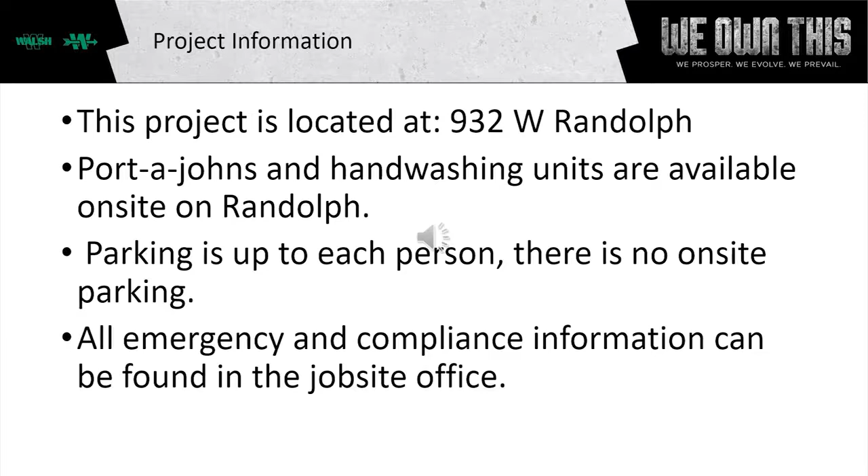Our goal for this project, and every Walsh project, is that no one gets hurt. We want each tradesperson on the site to own their work, and we encourage everyone to be a leader. No one gets hurt is more than just a phrase. It starts with top management being involved in all aspects of Walsh's safety. We encourage everyone at all levels to help us accomplish this goal to make sure that no one gets hurt. Everyone has the right to go home in the same condition as they started that day.

We own this. Take responsibility for your safety while at work. Take pride in what you do and how you do it. And look out for not only yourself, but those around you. We are all professionals. Act accordingly.

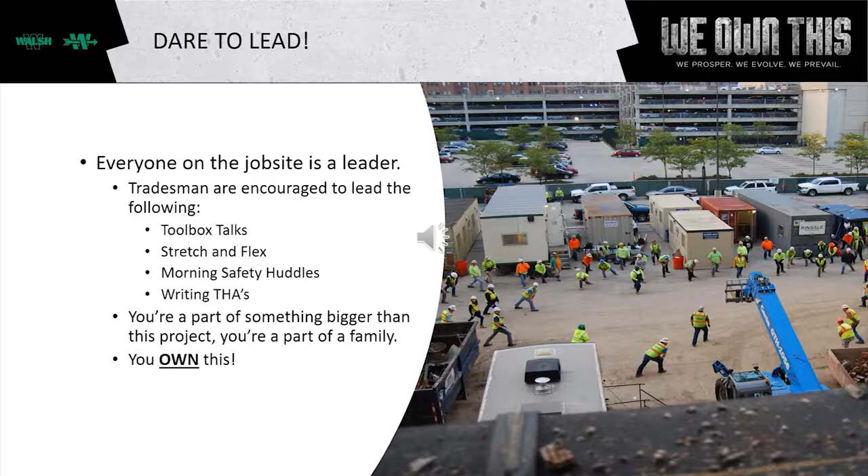Dare to lead. Everyone on the job site is a leader. Tradesmen are encouraged to lead the following: toolbox talks, stretch and flex, morning safety huddles, and writing the morning task hazard analysis. You are part of something bigger than this project. You are a part of a family. You own this. Craft Leadership in Safety, or CLS.

CLS is a craft-driven program that ensures craft workers have a voice in safety and safety of fellow workers. Each week, a volunteer from each company meets with the Walsh project manager to voice any concerns and walk the project site. The Walsh project manager will also address all concerns and direct resolution.

Craft Leadership in Safety, or CLS, is a program designed to create a culture where everyone has a voice. Craft employees working together with management through ownership and communication to achieve our goal that no one gets hurt.

CLS impacts the safety of the job site because it gives the craft a chance to all get together and get out in the field, take notes, and send it into management. By bringing all the trades involved every day, they can put their eyeballs on what they feel is a real issue that needs to be handled immediately.

CLS is important to me because it has allowed the craft another voice in Walsh's safety culture. Our goal is to encourage our project teams to promote CLS and start implementing this important strategy on their job sites.

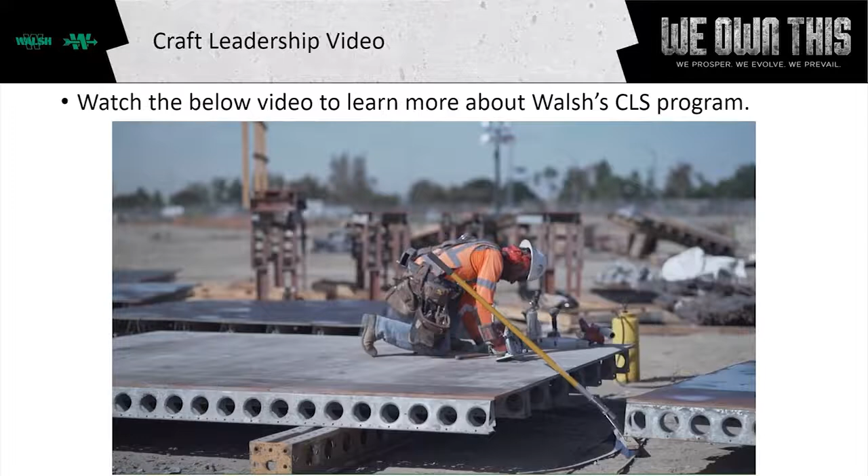Nobody gets hurt here is the most important thing, and when we include that with the CLS, we make sure that we're going the extra step to make sure that people are being engaged in the safety. It's not just us telling them what to do. They're giving their input into us as well.

It is essential that craft employees work together with management in this process. The way we can make this process work is through the 5 keys of the CLS program.

Key number 1, management to communicate with craft leadership. We need to feel and engage everybody on site. This job, or all jobs, are a team effort. I'm not going to do anything that's successful without my team. We want to make sure that we designate the time and really put some thought into it, and make sure that what we're asking our folks to do, we all take it serious, we all take part, and we do the best we can to make sure everything, every day, is smooth, safe, sound, and everyone happy moving forward.

Key number 2, picking the right people to participate in CLS. I think what makes you a good person to be part of this team is that you naturally want to look out for other people and you want to make sure that everyone is being safe. CLS is for the craft. In other words, out in the field, we have electricians that come, carpenters, masons, painters, all different craft come together from the field and help us to improve our safety.

We choose one person from each company, and how we choose them is basically somebody who is engaged. We ask, but we want that person to be consistent, be part of our safety team, our culture out here, so that we can grow acquainted with them and we get good, honest answers, good feedback.

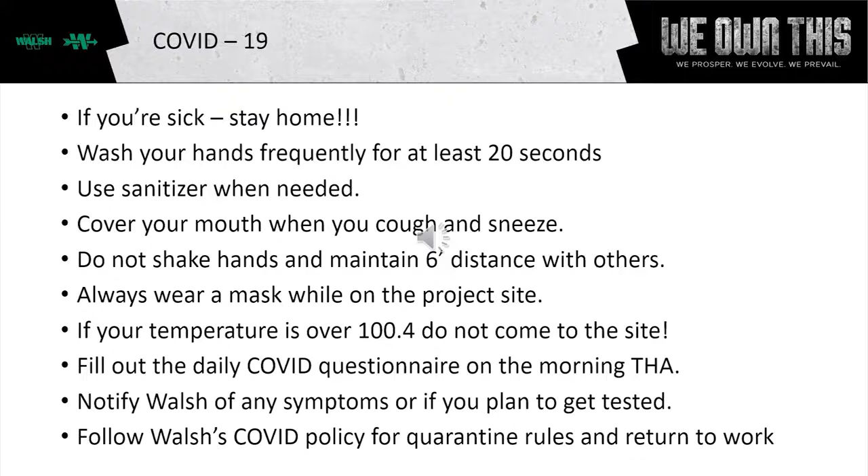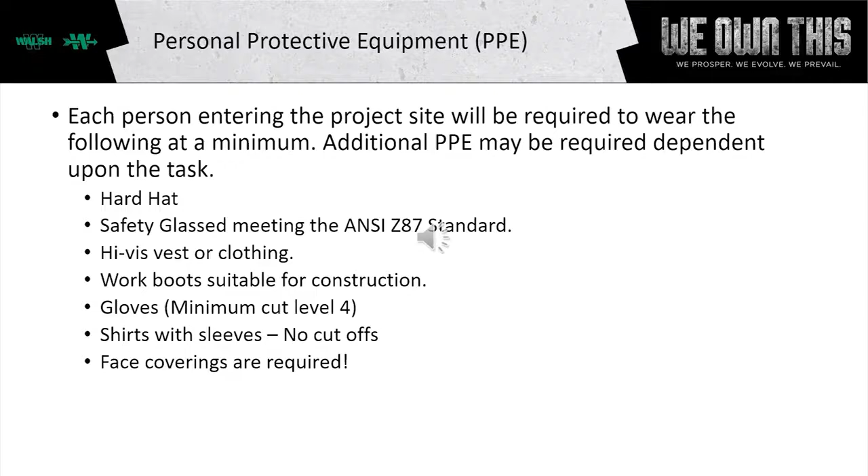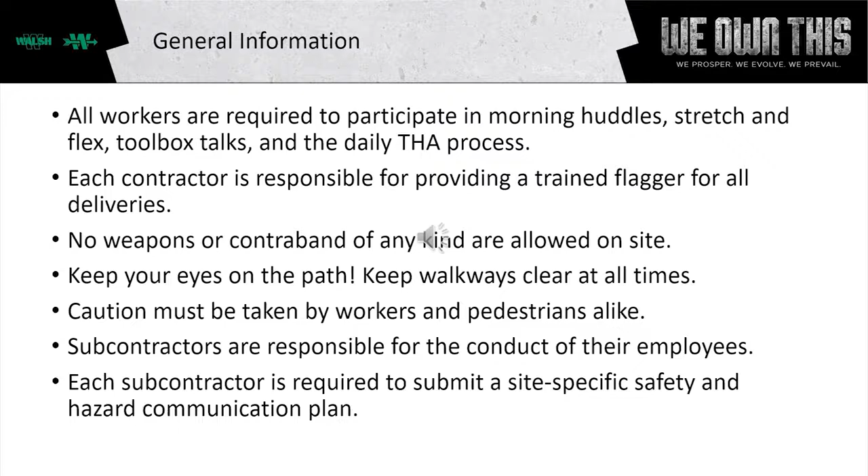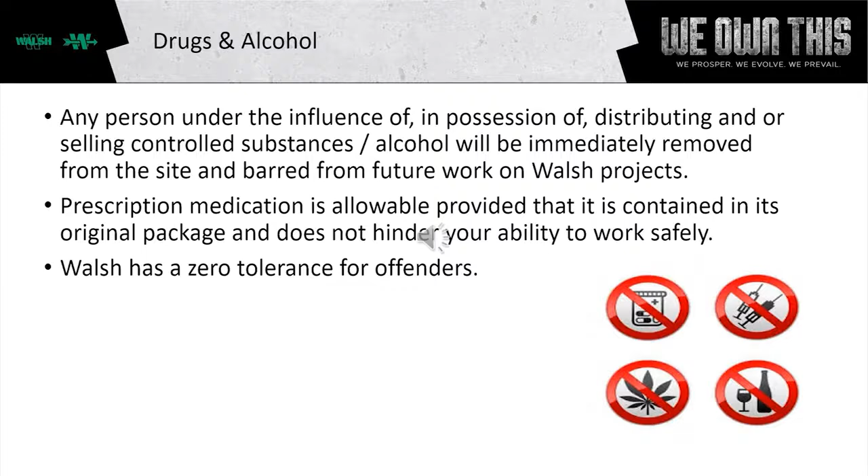Drugs and alcohol: any person under the influence of, in possession of, distributing, and or selling controlled substances or alcohol will be immediately removed from the site and barred from future work on Walsh projects. Prescription medication is allowed, provided it is contained in its original package and does not hinder your ability to work safely. Walsh has zero tolerance for offenders.

Emergency notification and evacuation: 3 blasts of an air horn will be used to evacuate the project site. The foreman shall keep an accurate count of their manpower throughout the day. Employees will report to their foreman once safely outside the site. Do not re-enter the site until instructed to do so by Walsh or local emergency services.

This project's evacuation meeting spot will be at the southeast corner of Randolph and Sangamon. Notify Walsh immediately if 911 is called.

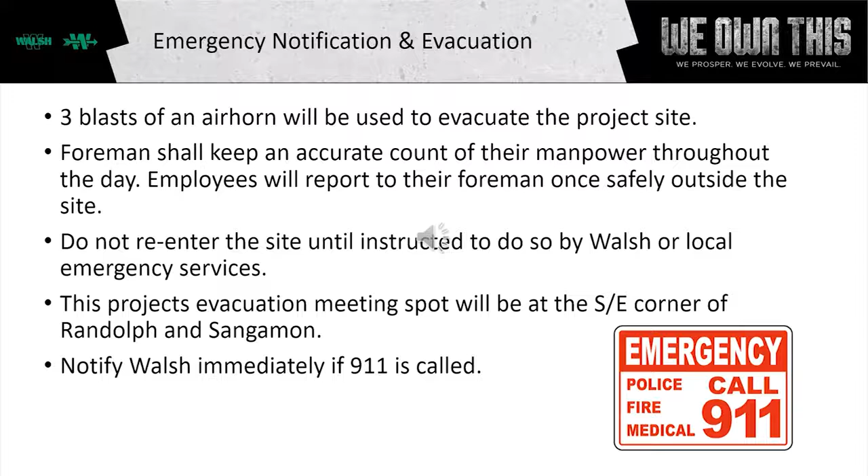Active shooter situations. The most important thing to do in this situation is to call 911. Give the dispatcher all available information, including a description or last known location, etc. Remember: run, hide, and fight. If possible, try to run and escape the area, leaving tools or belongings behind to get out as quickly as possible.

The second option is hide. This can be done in a bathroom, office trailer, under a truck, or anywhere else you can hide away from the situation until it's safe to escape. The final option is fight, and this should only be a last resort. Don't be afraid to use objects around you as weapons during that fight.

Accident, near miss, and injury reporting. All incidents, regardless of how small, must be reported to Walsh immediately. A formal accident report must be submitted prior to the end of the shift. Subcontractors shall maintain their own first aid kits near each work operation, and are responsible for transport and payment for medical treatment of their employees. Walsh has set up a clinic for Walsh employees only. It is the responsibility of each subcontractor to arrange for medical treatment of his or her injured employees.

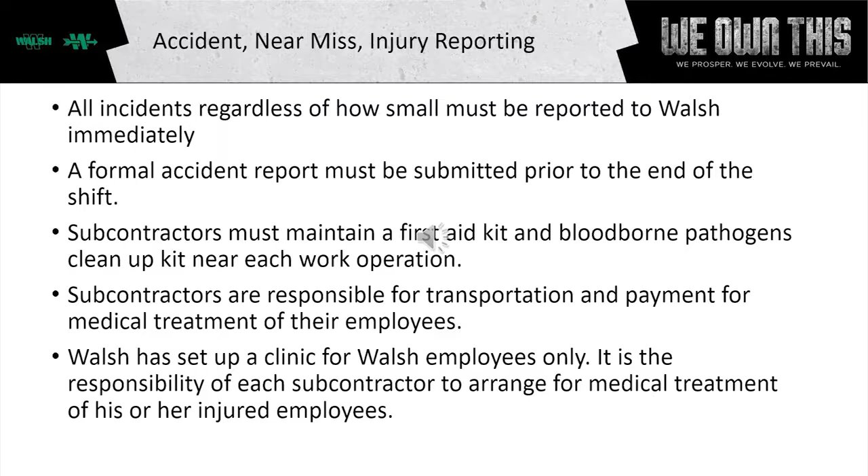Anti-harassment policy. Lewd, obnoxious behavior will not be tolerated on site. Harassment of any kind will not be tolerated on site. Violations of any type may lead to disciplinary action up to and including termination. Be courteous when dealing with the public. Any acts of harassment shall promptly be reported to Walsh Project Management.

Oh my. If mold, lead, or asbestos are discovered on a project, inform Walsh and it will be professionally abated. Do not remove it on your own. A silica exposure plan shall be submitted to Walsh prior to starting work. Dustless tools should be used when possible. Each subcontractor is responsible for creating their own plan. This includes silica plans, mold remediation plans, asbestos abatement plans, and lead abatement plans, as required by OSHA. Dry sweeping will not be permitted.

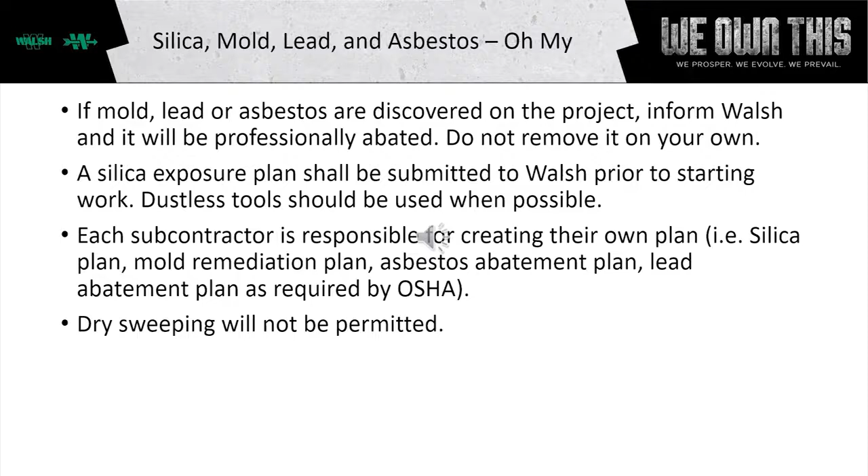Concrete construction. Employees working with concrete shall be adequately protected from the hazards of concrete, including chemical burns and silica dust. Formwork shall be designed and erected so that it is capable of supporting all vertical and lateral loads without failure. Formwork stripping areas shall be demarcated to prevent unauthorized entry. No employees shall be permitted to ride a concrete bucket or table. Rebar shall be protected in a manner to prevent impalement hazards.

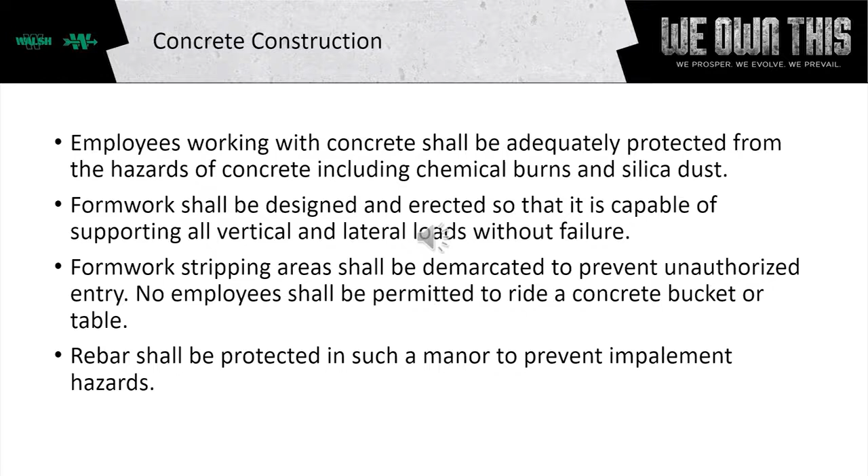Masonry construction. A limited access zone shall be established whenever a masonry wall is being constructed. No other employees shall enter that zone. All masonry walls over 8 feet shall be adequately braced to prevent overturning and/or collapse. This is to remain in place until permanent supporting elements of the structure are in place. A silica exposure plan shall be submitted to Walsh prior to starting any masonry work. Each subcontractor is responsible for creating their own plan.

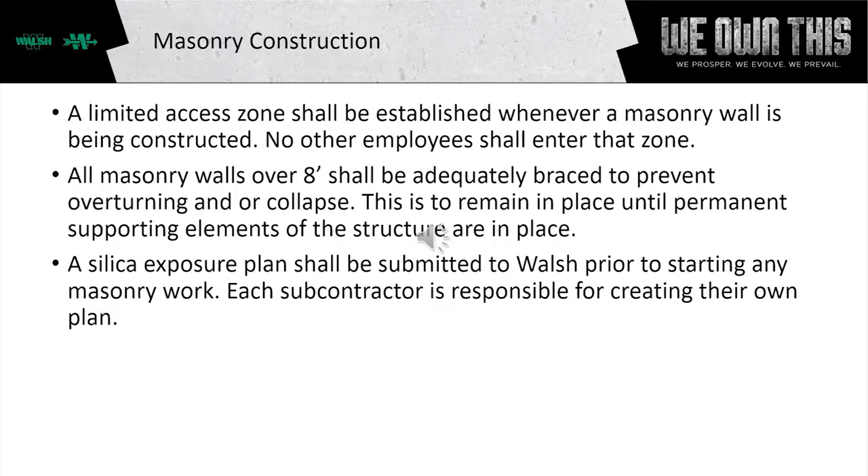Excavations. Excavating contractors are responsible for following all safety rules, including OSHA, state regulations, and Walsh and/or client-specific rules that may be more stringent. Daily pre-excavation checklist must be completed by the excavation subcontractor. Excavation contractors are required to identify their competent person to Walsh. The competent person must be present during all excavating operations. All open holes, trenches, and excavations shall be clearly identified and maintained in order to alert employees and the public of their presence.

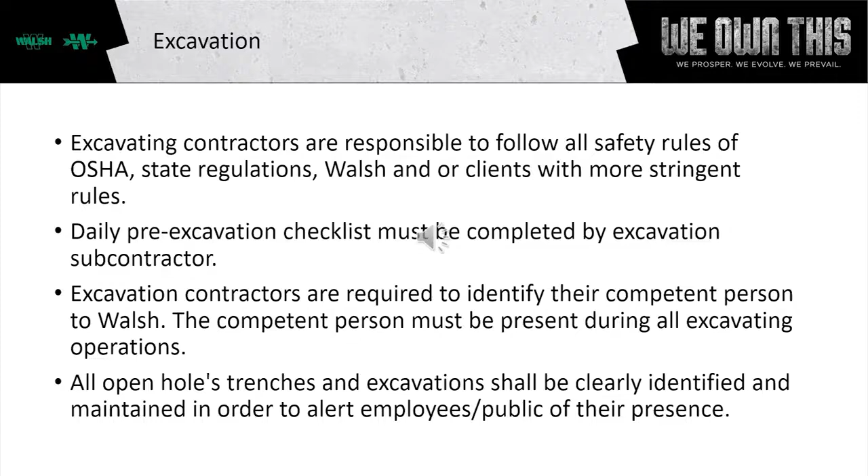Excavations continued. All excavations 5 feet or greater must be protected from collapse. A ladder must be used when excavations are deeper than 4 feet. All soils will be classified as Type C unless proven otherwise. Cleanup of the roadway is the responsibility of each vehicle leaving.

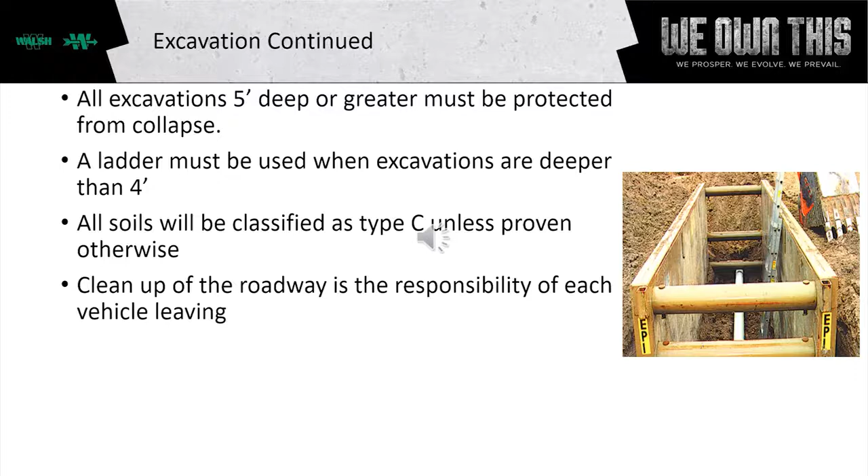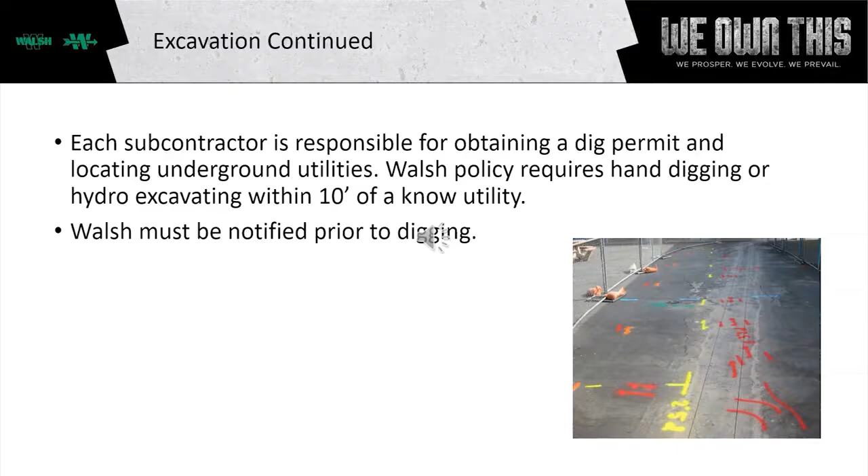Excavations continued. Each subcontractor is responsible for obtaining a dig permit and locating underground utilities. Walsh policy requires hand digging or hydro-excavating within 10 feet of a known utility. Walsh must be notified prior to digging.

Cranes. Use of cranes must be communicated and coordinated with Walsh prior to use. A crane survey must be completed for each crane prior to mobilization. Equipment is to be inspected daily prior to use, and a written daily inspection must be submitted to Walsh. Operators must have a valid training certification.

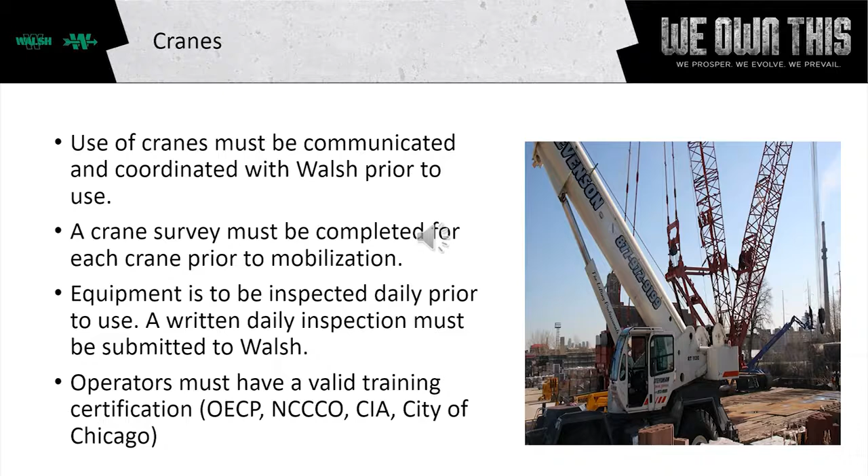Cranes continued. Operators shall not hoist improperly rigged loads or loads that exceed capacity. All rigging must be inspected prior to use and used under the supervision of a competent person. The swing radius shall be barricaded where caught-in or struck-by hazards exist. The crane signal person and riggers shall be adequately trained and qualified.

The crane must not operate within 20 feet of overhead power lines. Loads require a tagline when conditions warrant.

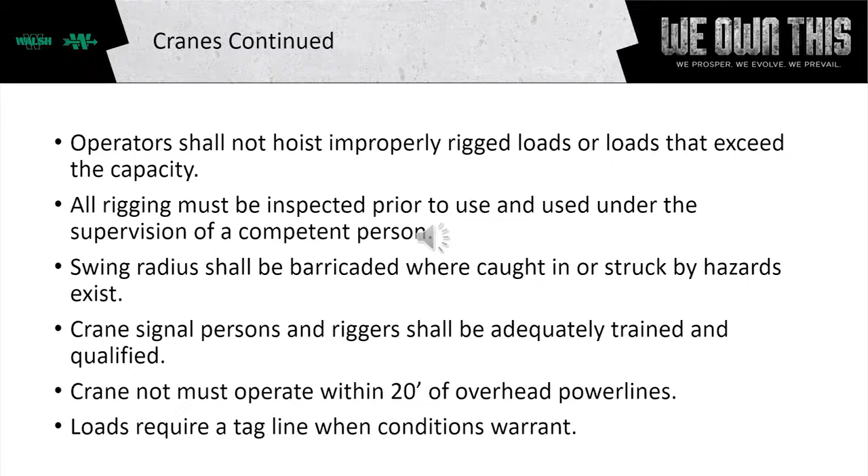Heavy equipment. All equipment must be inspected before each shift. All equipment users must be trained in how to safely operate assigned equipment. Workers shall be alert when working around equipment for blind spots and struck-by hazards. Seatbelts are always required to be worn while equipment is in use.

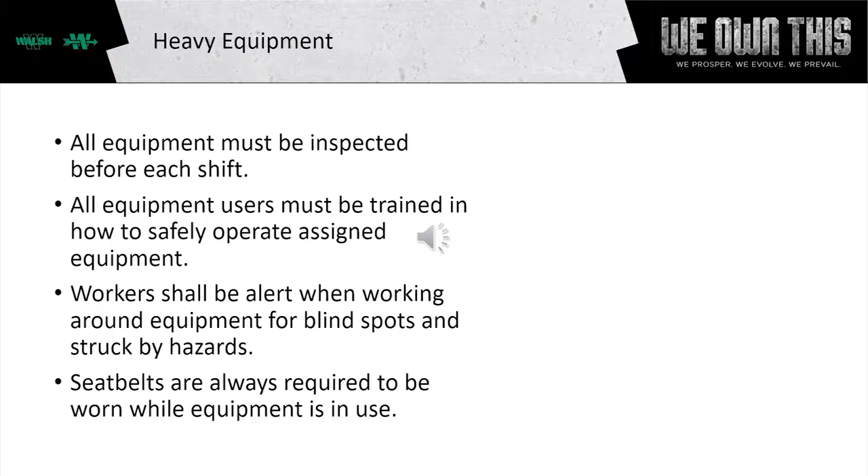Discipline policy. Documented disciplinary procedures will be filed if workers violate Walsh, OSHA, or client-specific project rules. Fall protection or immediate danger to life or health violations will result in immediate discharge from the job site. All other discipline will follow the progressive 3-strike rule.

Daily Task Hazard Analysis, or THA. THAs are required daily from each subcontractor. THAs must be reviewed with crews, and signatures from all crew members are required. If new hazards become apparent, the THA must be updated. THAs should be turned into the Walsh Superintendent daily. This is a living document and should be updated as needed.

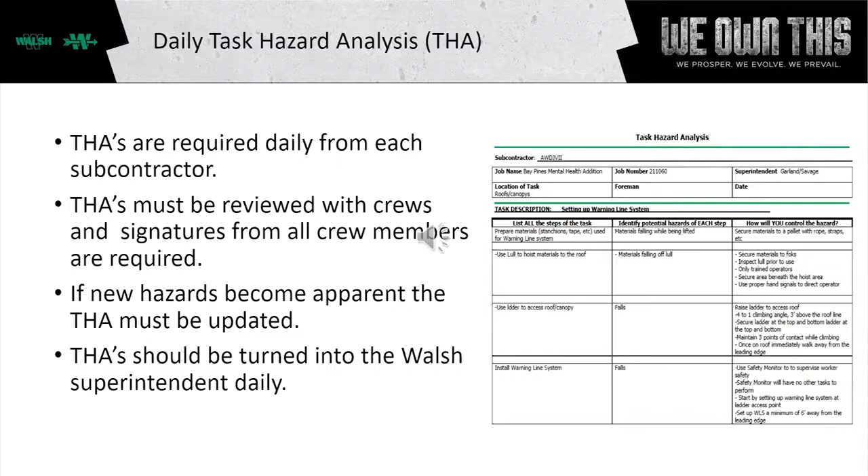Ladders and stairs. No metal ladders will be allowed on the project. 3 points of contact shall be maintained at all times while using a ladder. A good point of reference is to keep your belt buckle between the two rails of the ladder. This will prevent you from falling off. Never stand on the top step or highest rung. An A-frame ladder should never be leaned against the wall to be climbed.

Keep stairs and stair landings free from accumulated debris. Ladders should be inspected prior to each use. Keep the top and the bottom of the ladder free from material and debris.

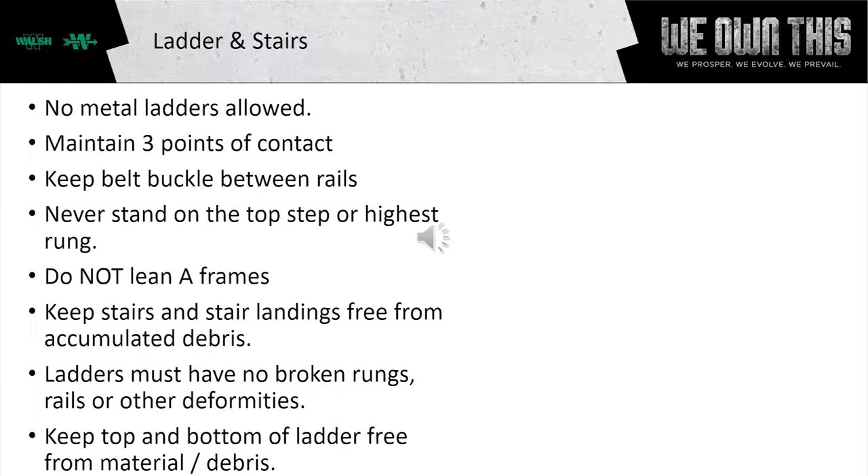Ladders and stairs continued. Lean-to and job-made ladders must have rails extending 3 feet past landings and be secured. Step ladders must be fully extended and locked into place. Placement shall be on stable surfaces. Employees shall not straddle or stand on the ladder's top 2 rungs. Ladders shall be inspected routinely by a competent person.

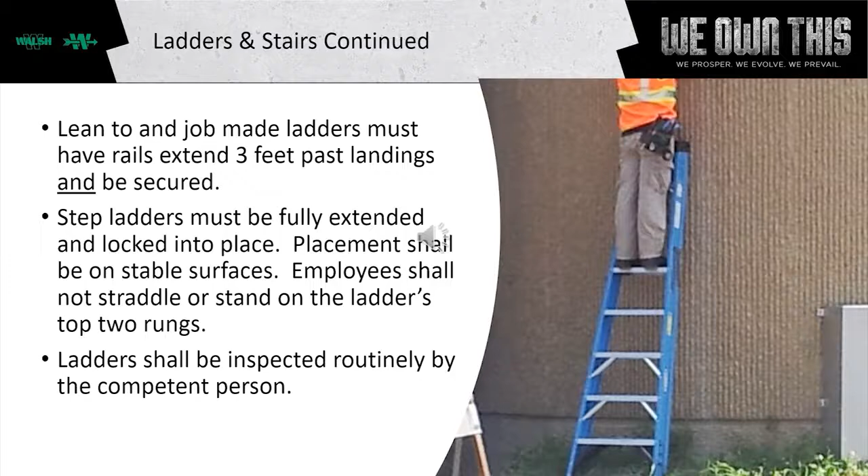Scaffolding and bakers. Subcontractors must have a competent person on staff while erecting and dismantling scaffolding. A guardrail must be installed after 6 feet of height on a scaffold system. This includes toe boards. The base plate and toe plates must be installed as required by the manufacturer. Mud sills shall be placed to assure footing and protect existing flooring. The use of concrete cinder blocks as mud sills is prohibited.

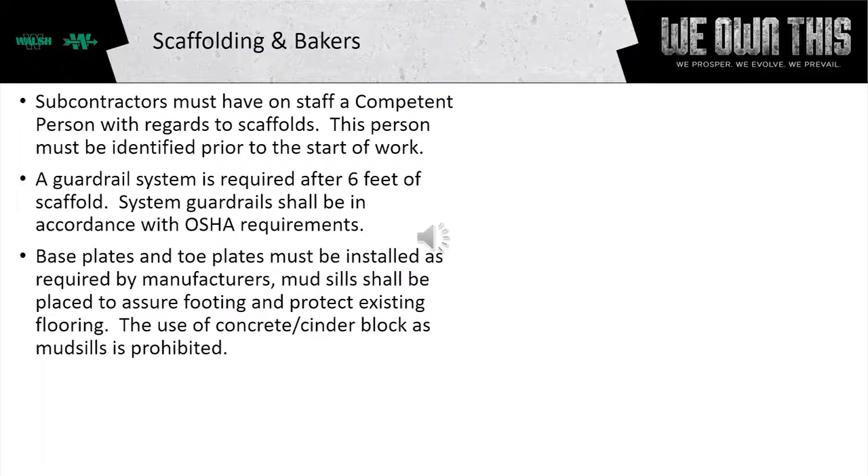Scaffolding and bakers continued. Screw jacks must not exceed 12 inches, unless allowed by the manufacturer. OSHA-compliant planking must not overhang less than 6 inches or more than 12 inches. Proper access must be maintained to all scaffolds. Climbing of cross bracing is forbidden. All personnel erecting or working on scaffolds must have adequate training.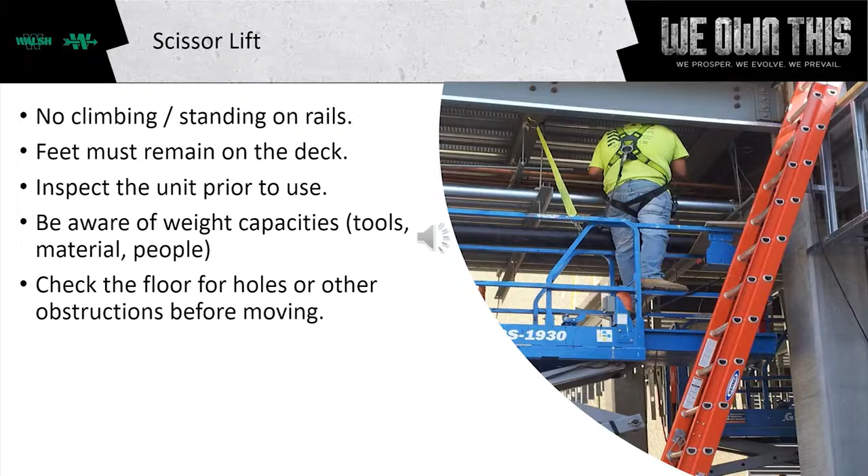Fall protection. Anytime a worker is exposed to a fall greater than 6 feet, they must be protected by either a guardrail or personal fall protection. Anchor points should always be overhead. Proper leading edge or sharp edge retractables are required. Fall protection equipment shall be inspected before each use.

Roof work. Only roofers are allowed to use pennant flagging as a means of fall prevention.

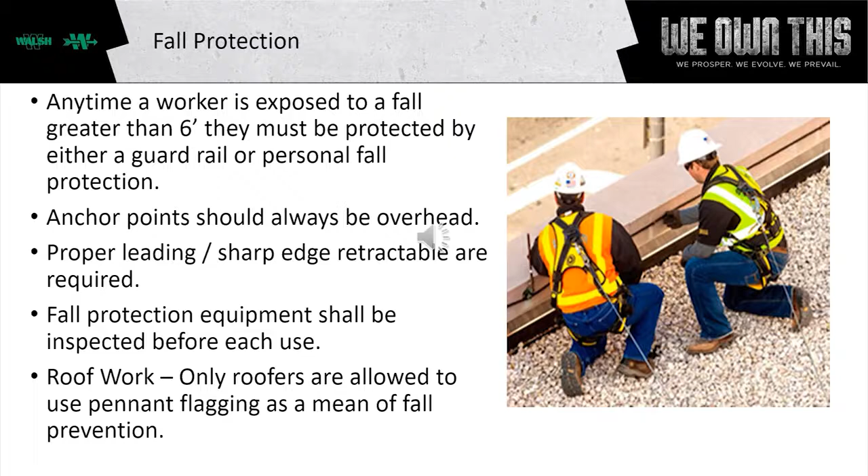Fall protection continued. Guardrails must be maintained as originally erected. A top rail must be placed between 39 and 45 inches. Mid-rails shall be placed at a height of 21 inches. Toe boards at a minimum of 4 inches in height are required.

Wire rope guardrail shall not be used as an anchorage point unless they are proven to be the proper strength for anchor points by an engineer.

Subcontractors shall not enter unprotected areas with a fall potential of 6 feet or more. Walsh supervision must be notified immediately if any guardrails are missing or damaged. Contractors are responsible for protecting fall hazards created through their course of work. This includes demolition, saw cutting, etc.

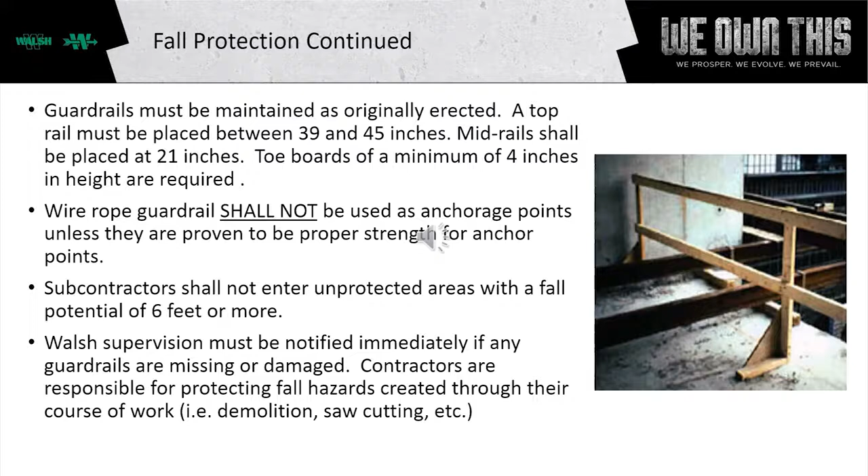Electrical safety. Subcontractors must use ground fault circuit interrupters, or GFCIs, for protection against shock or electrocution. Monthly testing by an electrical subcontractor must be conducted on all GFCIs and documented.

Cords should be inspected prior to each use. There should be no cuts in the cords, missing ground plugs, etc. Generators must be equipped with ground fault circuit interrupters or GFCIs.

Electrical safety continued. The electrician will provide temporary lighting in common areas. Each trade is responsible for task-specific lighting.

All known or suspected stored energies, this includes electrical, pneumatic, hydraulic, etc., must be released and locked out prior to work, especially during demolition. A lockout-tagout program must be submitted by all subcontractors prior to working in these areas.

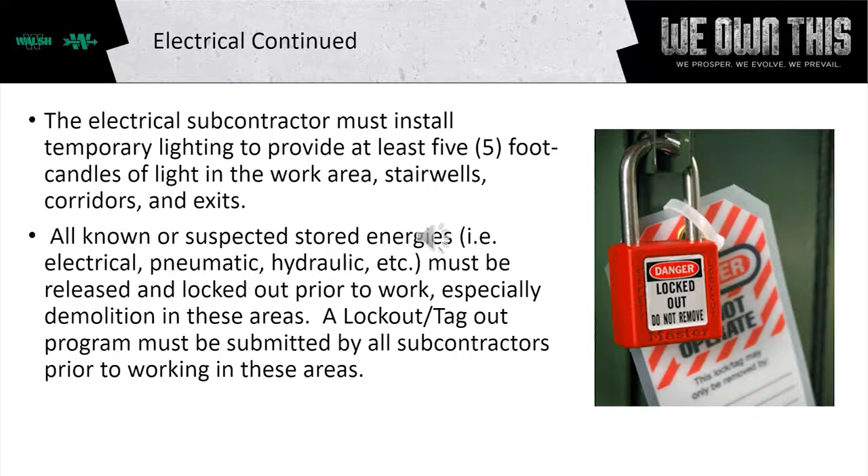Fire safety. Compressed gas cylinders must be secured to prevent tipping. Oxy and acetylene cylinders must be stored on a fire-rated cart or separated by 20 feet of space. Cylinders shall have their caps installed when not in use.

Flammables must be stored outside the building in accordance with OSHA regulations. Fire extinguishers are located throughout the job site. However, contractors who are performing hot work must supply their own fire extinguisher.

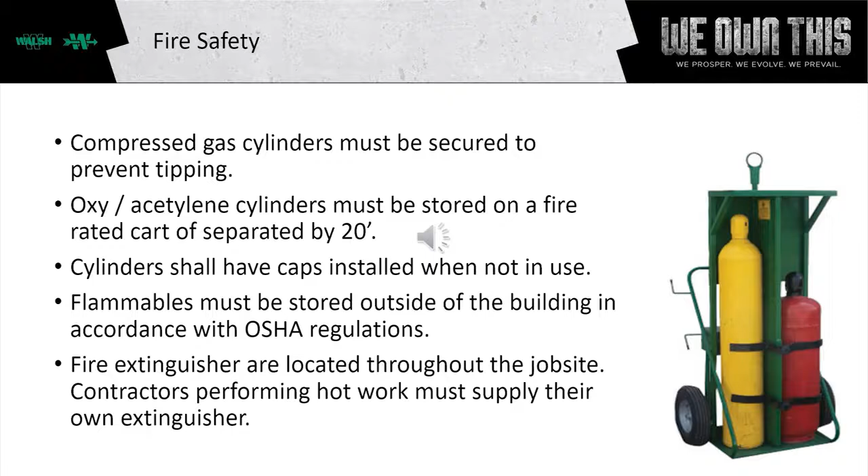Hot work. Hot work permits must be filled out before work begins. These are required for each operating shift. Firewatch persons must be designated, trained, and have no other duties. Firewatch must remain for 30 minutes after work is complete.

Contractors conducting hot work must provide their own extinguishers. Flash screens or curtains are required when other trades are exposed. Remove combustibles and wet down the area before starting hot work.

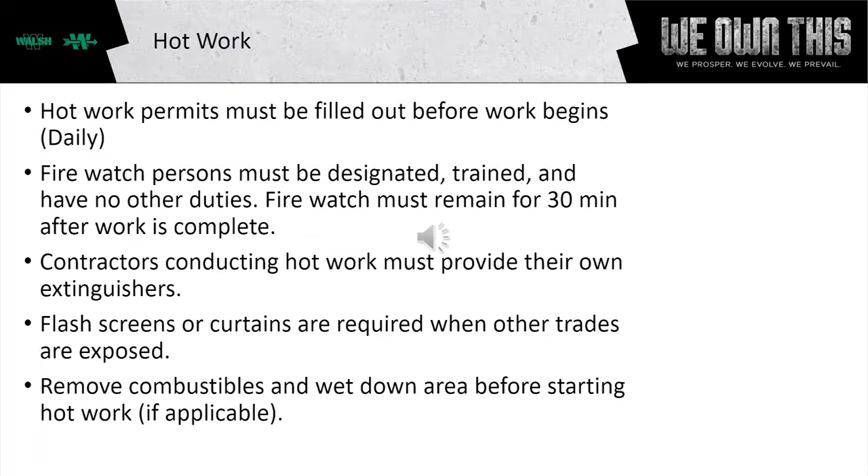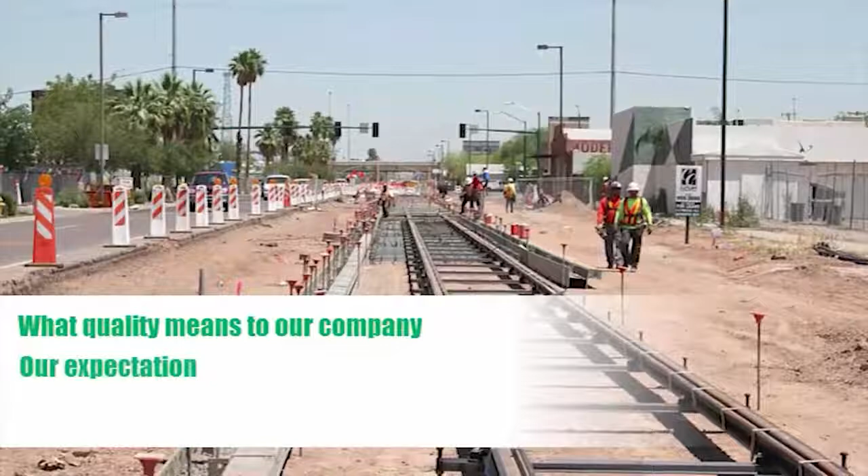Welcome to the Walsh Group New Hire Quality Orientation. Today we'll cover what quality means to our company, our expectations, and your responsibilities as it fits into our proactive quality culture. It is important that you understand how quality relates to the success of the work that we do, and why that is important to the Walsh Group and our clients.

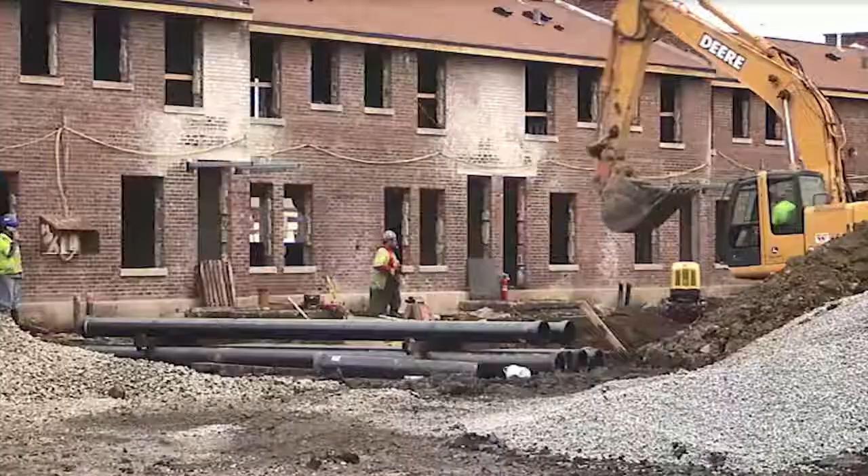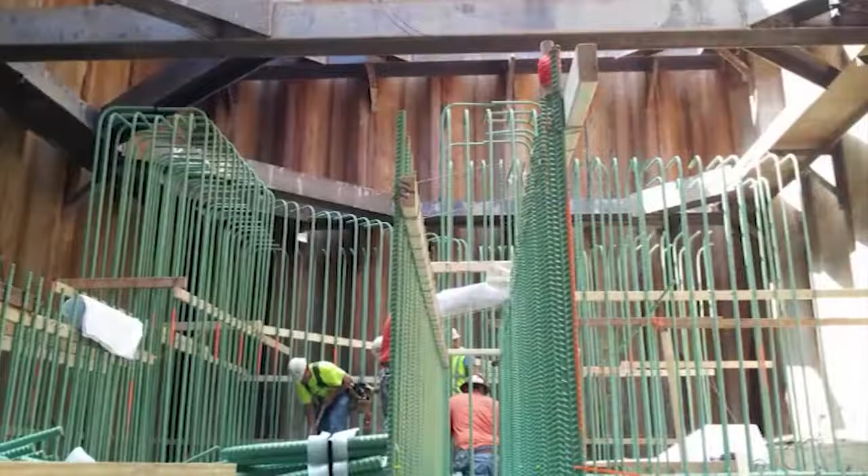At the Walsh Group, setting the highest standard of quality is one of our company's core values. At Walsh, quality is a proactive approach to prevent issues from occurring, to ensure projects are built per our quality policy, right the first time. In order to be the builder of choice for our clients, our teams dedicate themselves to delivering a superior product for every project.

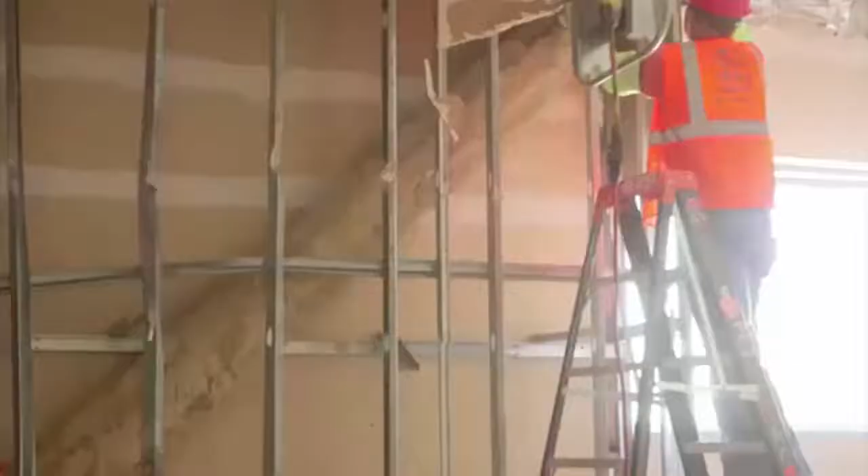Walsh's quality program is modeled around a three-phase system. It starts with planning out the work on paper before the work begins, then setting an initial standard of workmanship, and continuously following up on the project to assure compliance. Simply put, plan the work, work the plan.

As a professional craftsman, your responsibility is to do the job right the first time. Furthermore, quality means doing it right when no one is looking, and that is what we expect out of each of you. So why should we focus on quality?

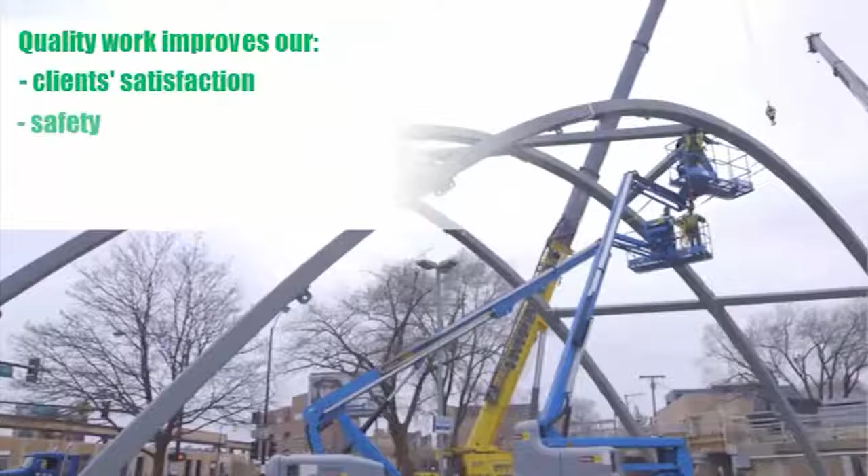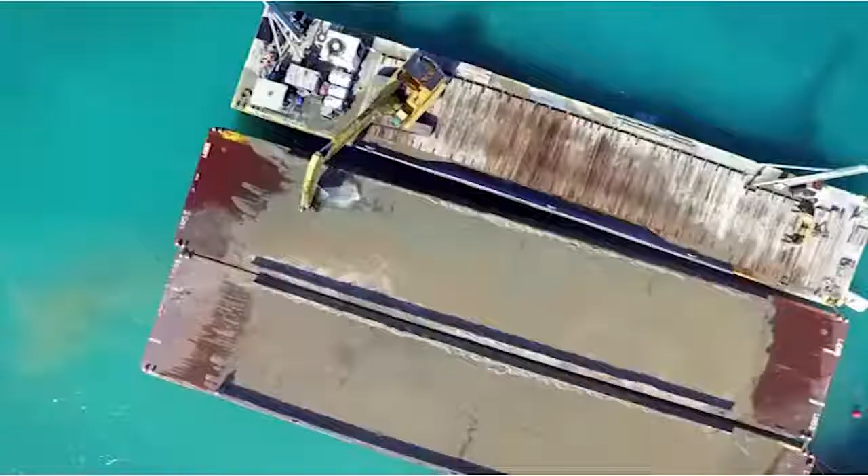Quality work improves our client's satisfaction, our safety, our schedule, and costs. It eliminates unnecessary safety exposures from rework. Producing high-quality work will establish trust and reliability with our project owners, leading to repeat business. It maintains project schedule and reduces delays. And quality reduces the need for rework, which equates to keeping construction cost within budget.

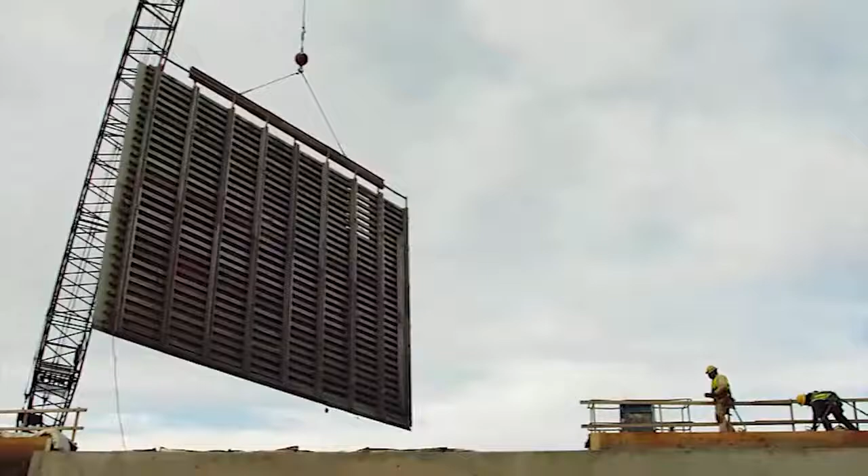Remember that quality is not about being good enough, better than, or less than. Something is either built correctly or it is not. At the Walsh Group, we have many initiatives to help ensure that we build it right the first time. Quality is communicated daily to our workforce through daily quality discussions.

Your workday will start with completing the Safety Task Hazard Analysis, THAs. Next, you'll have a quality awareness discussion for the immediate task at hand.

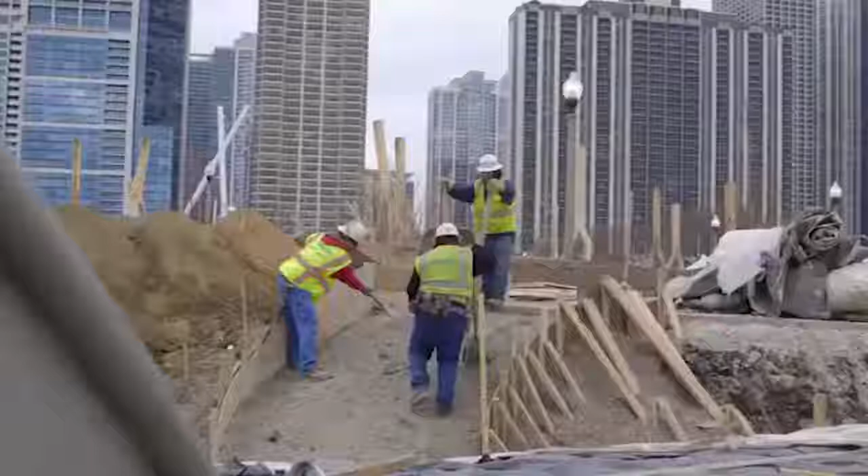Many of the errors we make or the substandard work we produce are caused by a lack of proper planning. During the quality discussion, ensure you understand the work plan, quality hold points, know the approved materials to use, and have the proper tools and equipment.

Another tool we use is called the good catch. It means for each of you to speak up and be proactive about safety, quality, or operational issues, and to stop incidents from occurring. Sharing our lessons learned through good catches helps promote more strategic approaches and provides recognition and reward.

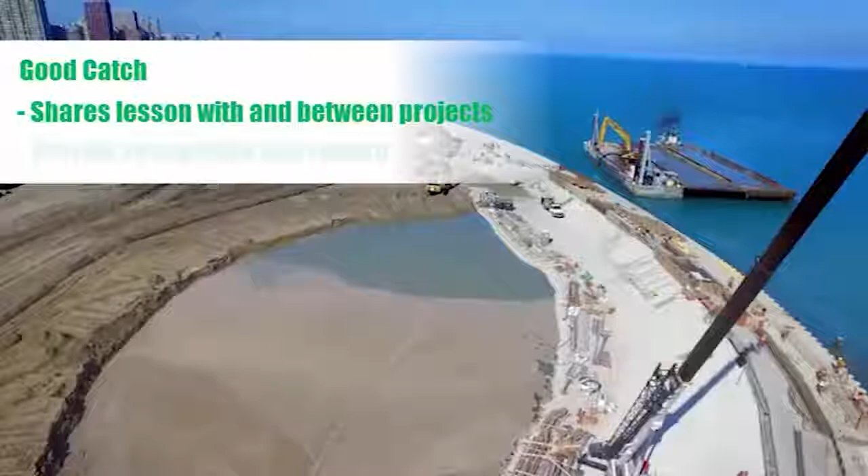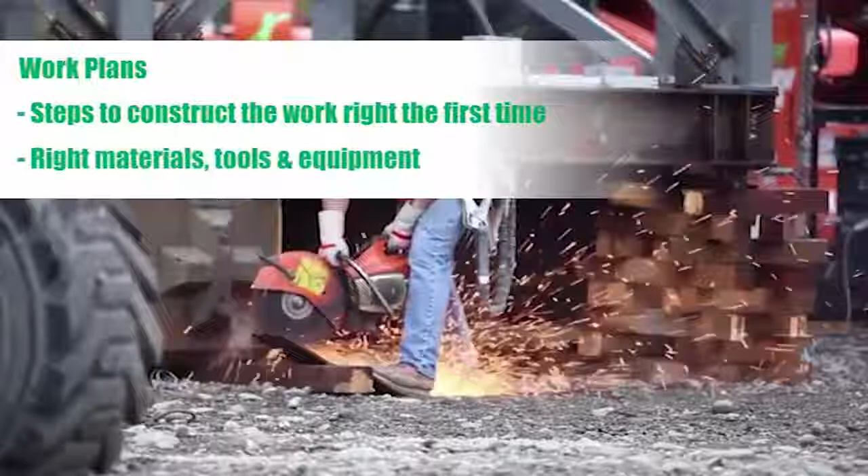Work plans are essential to the success of what we do. Work plans are a valuable tool that lay out the requirements and steps to construct the work properly with the right materials, tools, and equipment in a safe and effective manner.

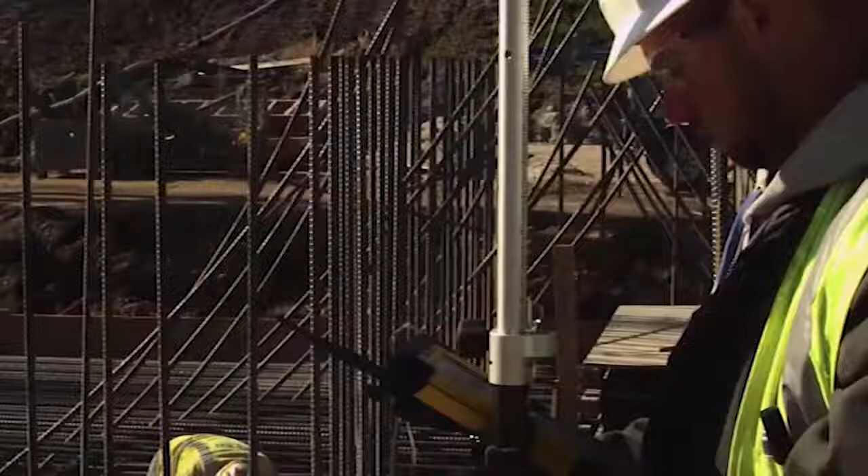Engineers, superintendents, and quality professionals work together to develop work plans during the preparatory phase to ensure that we're ready to build our work right. Work plans provide transparency to the client, management staff, and you for all aspects of the operation. Each foreman is expected to have and utilize their work plans in the field as a discussion and reference tool.

During your work activities, there are times in which the work needs to be inspected or materials tested before we proceed to the next step. These are called hold points.

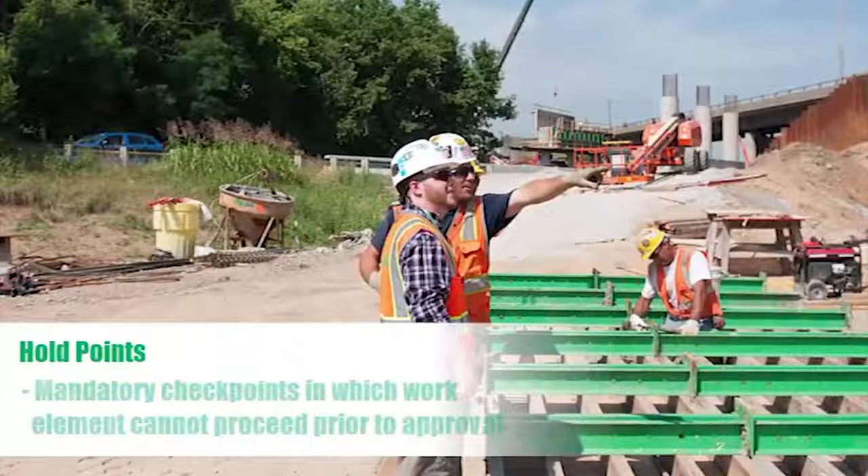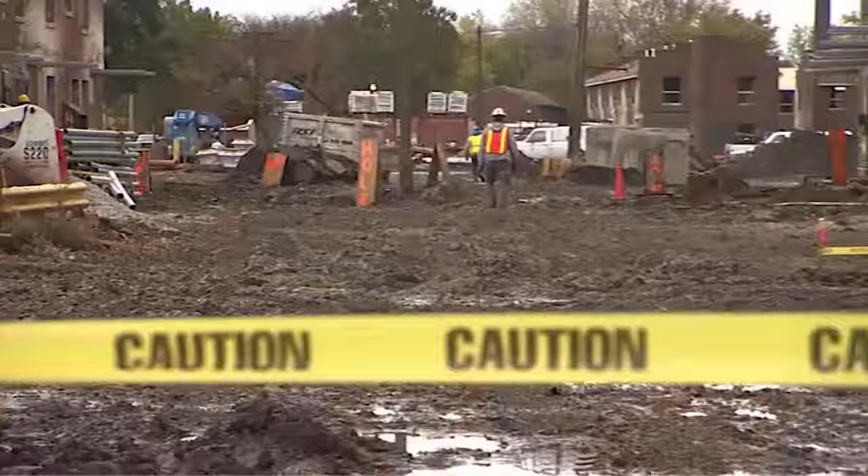Hold points are mandatory checkpoints in which a work element cannot proceed prior to approval by the client or quality inspector. During work plan reviews and daily quality discussions, hold points should be discussed so that the team knows when work needs to be inspected before moving on, and so that notification can be given to the necessary parties.

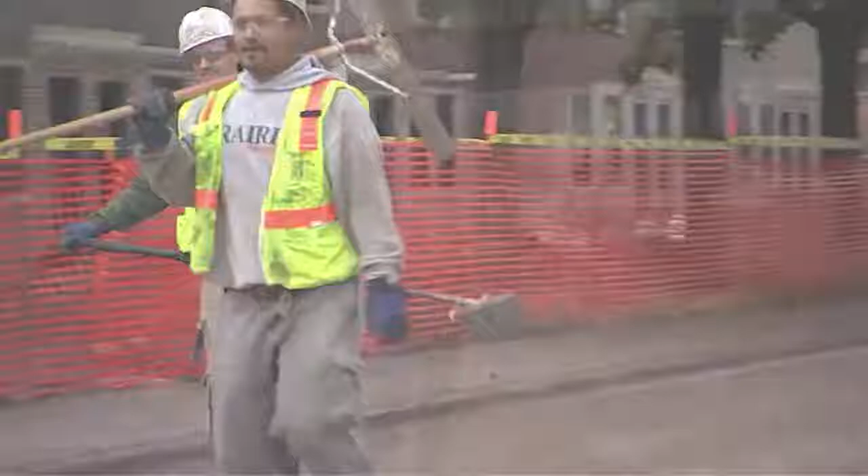It is vital to the success of the project that hold points are not overlooked and that works are not covered up until they are inspected or tested and approved by the client or quality representative. This will drastically reduce the amount of rework on a project and improve our clients' satisfaction.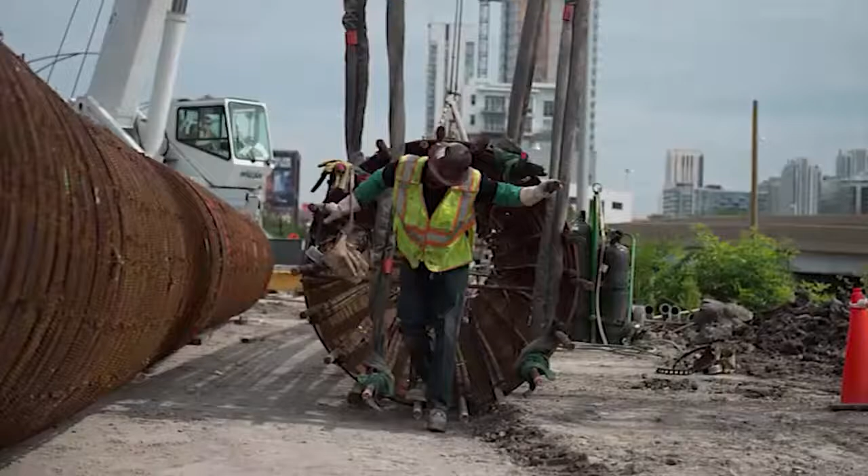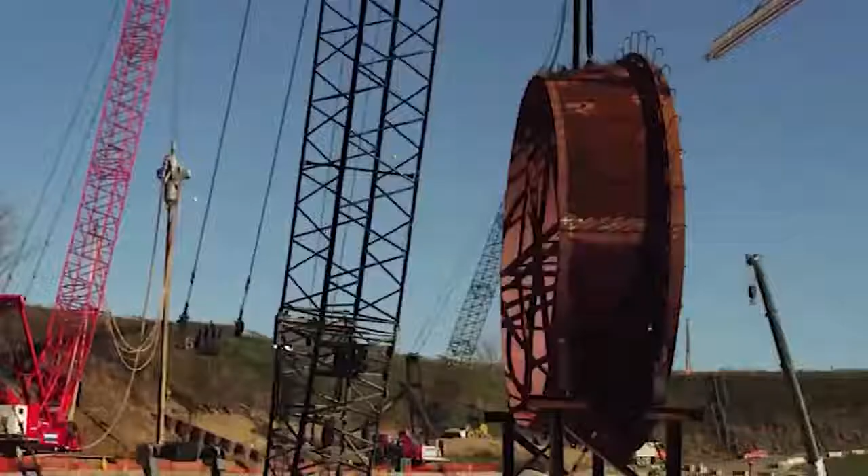As a responsible craft worker, it is your duty to understand and achieve the quality requirements of your works in a safe and effective manner. We are all part of the quality team, and we all have the responsibility to deliver to our clients a final product meeting all of the requirements of the plans and specifications.

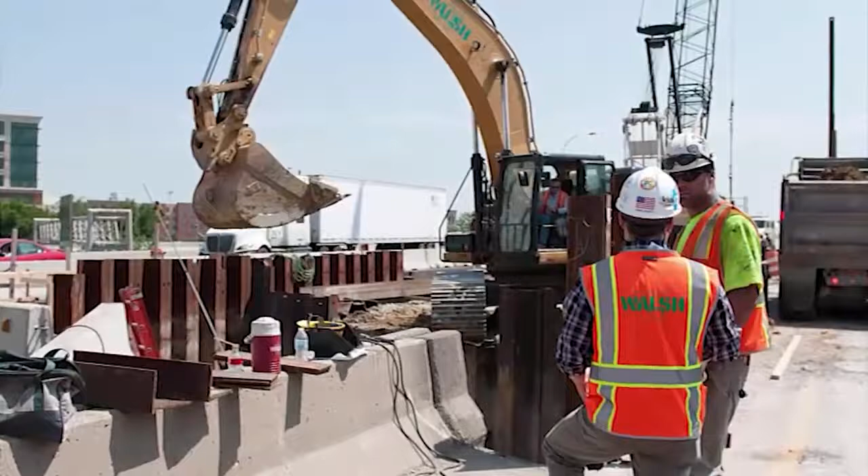At the Walsh Group, we all have the authority and responsibility to stop unsafe acts and stop non-conforming work from occurring. This stop work authority empowers all workers to stand in the way of a deficient work product or unsafe practices, whether it's your work and crew or the work of another crew or subcontractor.

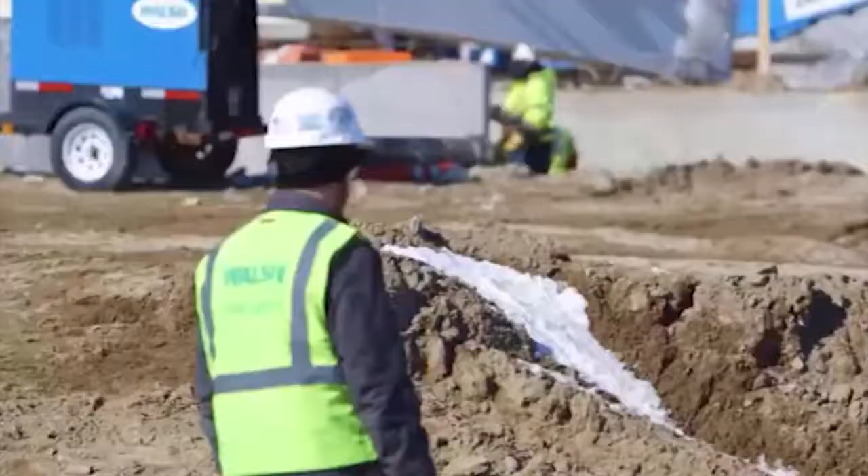It's your duty to report items that don't look right or that aren't done per the work plans and specifications. Speak up and discuss with your supervisor so we can stop the rework.

The success of our quality control program depends on each and every one of us and how well we do our individual jobs and daily tasks.

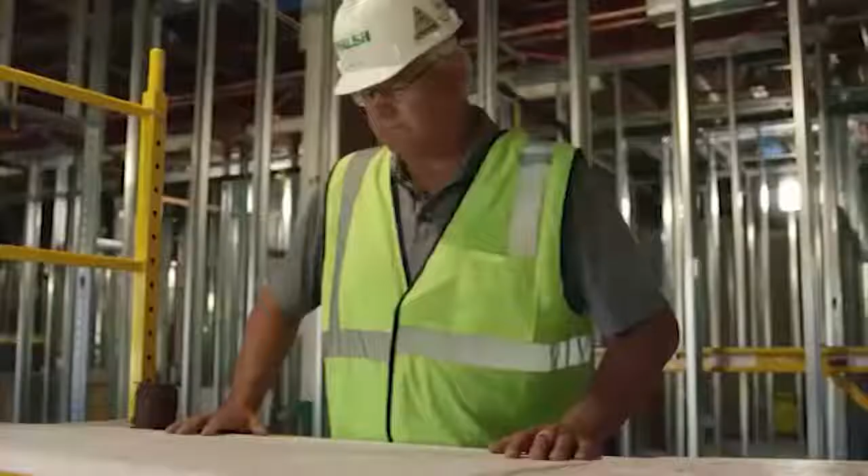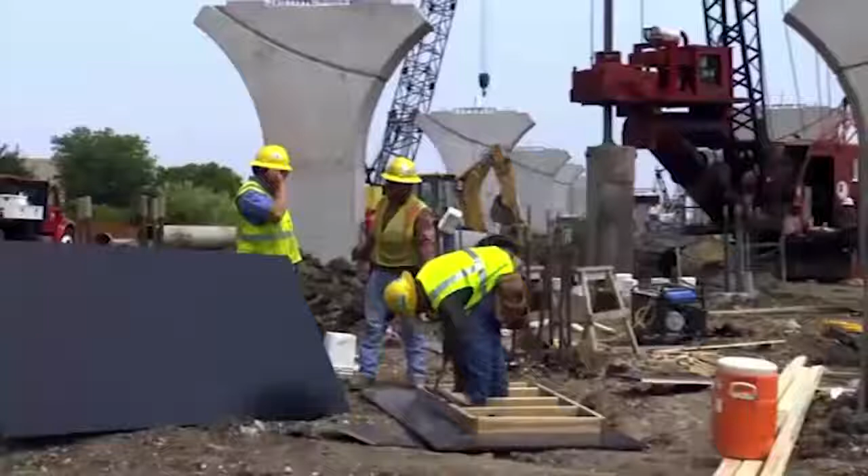Quality starts with you. We are here on this project as the builder of choice, the employer of choice, to set the highest standards for ethics, quality, and safety. Your professional craftsmanship will make this project a reality and a lasting source of pride and accomplishment.

Remember, as a team, we are committed to building projects together safely. We are going to build it once, and we are going to build it right.

Dan Walsh believes quality is the only legacy we leave our customers, and we are committed to delivering on his ideal.